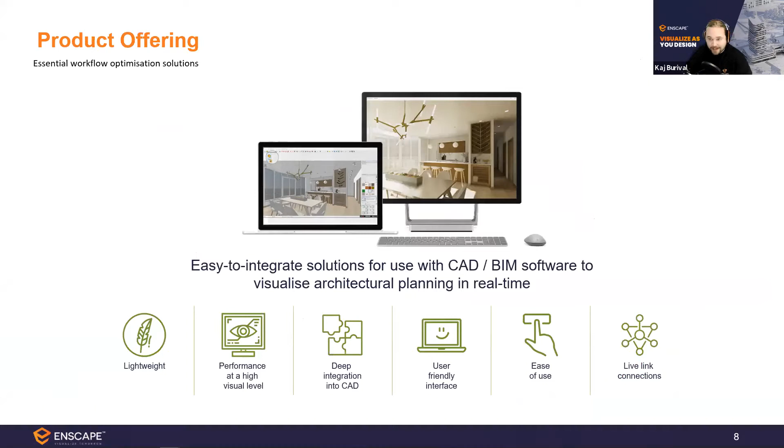Yeah, again, one of our main principles is to integrate directly with existing CAD, BIM, design software, that is Revit, ArchiCAD, SketchUp, Rhino, and Vectorworks at the moment. And this is really what puts one of the main benefits of Enscape into perspective.

With other visualization solutions, you will have a project that you're working on, a project that is stuffed with all manner of data, BIM information, fire safety and whatnot. And whenever you want to visualize it, you will have to take that model out of its course, out of the pipeline, and add some extra work, add materials, illuminate it properly, and of course also export renderings, whatever you may aim for, videos, images. And this alone is a huge time factor.

If anyone in the audience has visualized using a traditional visualization software before, you might have experienced that it can take literally hours to generate a single image on the computer, to render the image. And all of this is being solved by Enscape, because as you see at the bottom here, Enscape stays within your existing design. It accompanies your workflows.

We'll have a look at that in a second, but that means you see, of course, what you're changing. If you're changing a material in your design application, you will see that immediately in Enscape without having to deal with import, export issues and all of that. But that's just the start, because Enscape can also access your geolocation information in your design software. It can access your 3D views, your visibility settings, and in the case of Revit, for example, also things like design options, section boxes, and so on.

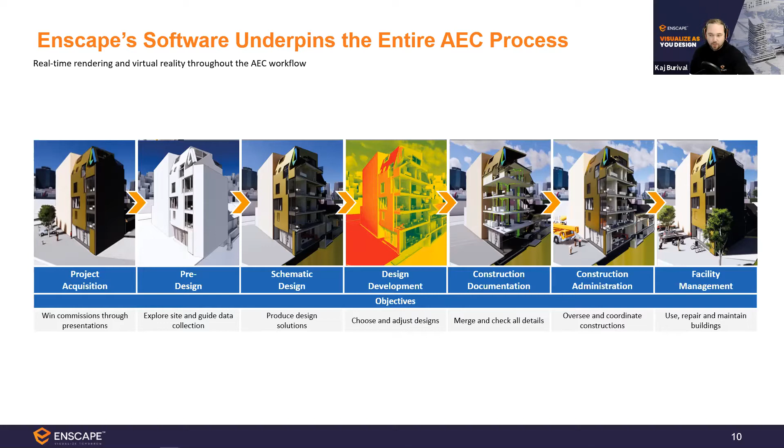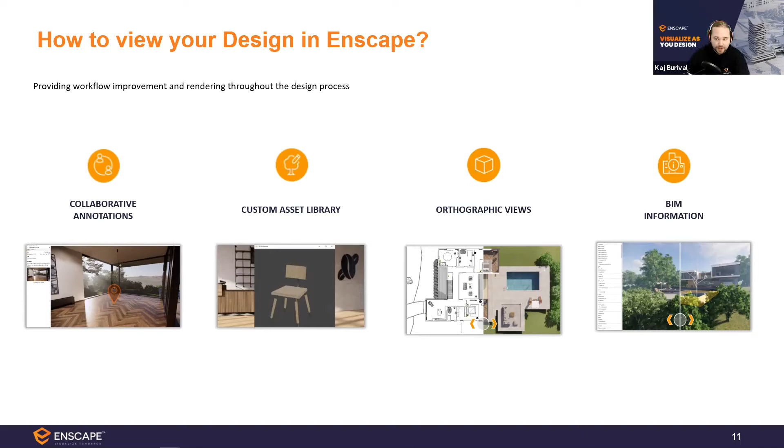We have BIM information loaded directly into Enscape, so you can use Enscape as a full stack, so to say, reviewing tool and get everything you need to know about your design immediately right from one source. This is also a couple of features that I'm going to show you live in just a second.

And you can even export standalone experiences from Enscape, meaning we can export one single file that your client or your supervisor, whoever, can open on their machine, and they can enable VR in that with just 1 click as well. And they don't even need an Enscape license for that. So you can generate entire experiences right out of your professional model with just 1, 2, 3 clicks.

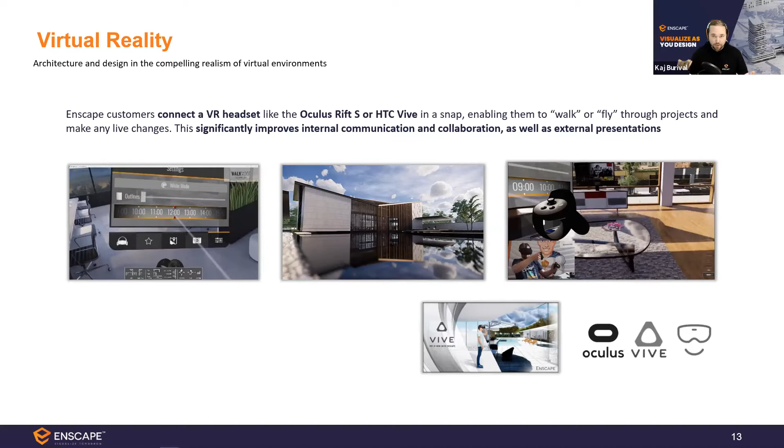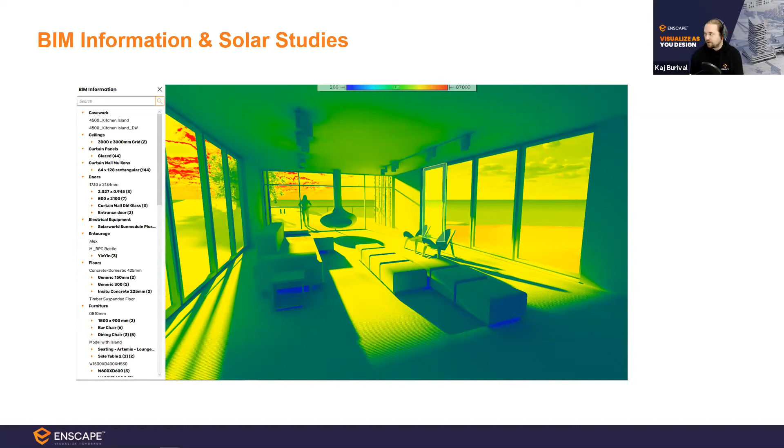So let's go to Revit. And I thought for this session, I would like to present on this basic sample project, which is being shipped with Revit, because I think it points out how Enscape can access any kind of model right away. You can put a lot of work into your visualization, polish everything and make it look just the way you want, but you don't have to. Enscape is really designed to be user-friendly.

So as opposed to a lot of other visualization softwares out there, you can really start with 1 click up here, open a window, and you have a great visualization right away. So visualization for everybody, that is what we are aiming for. Now, this is what Revit will look like after you have installed Enscape. You can download the installer as mentioned right away from our website and try it yourself. And this is what it will look like.

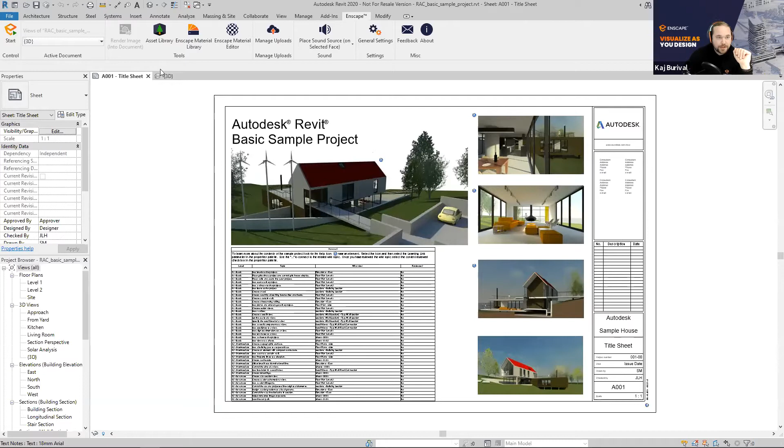Now we have a sample project provided by Revit, shipped with Revit. You can open this very sample project right away in your Revit instance. And we have Enscape set to default. So this is what Enscape looks like right out of the box once you've installed it. And I'm just going to click the start button up there.

You have noticed we have this additional toolbar in Revit, of course, that comes with the Enscape plugin. I'm going to go through the individual buttons and tell you what those mean. But this is the main effect I wanted to show you. Enscape will open in a separate window right away. It's a separate window, so it is probably more comfortable to work with it on two screens, so you can continue having Revit in full screen, but it works this way just as well.

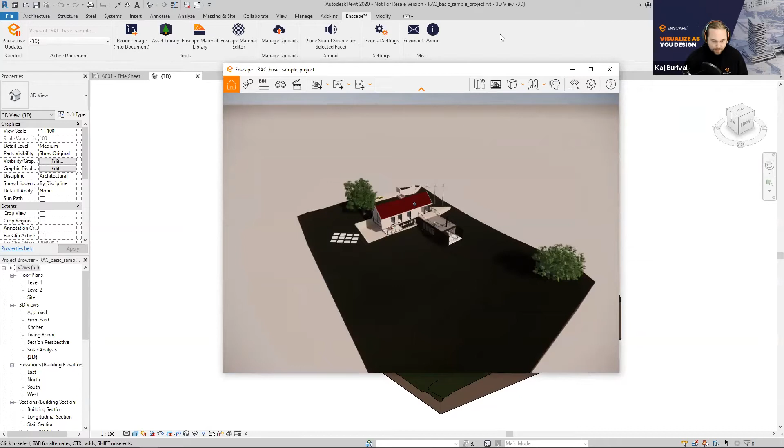And I'm going to use a little trick here. On Windows machines, you can press the Windows key and the right arrow key to dock one window to one half of the screen. And I'll keep Revit on the left half of the screen here.

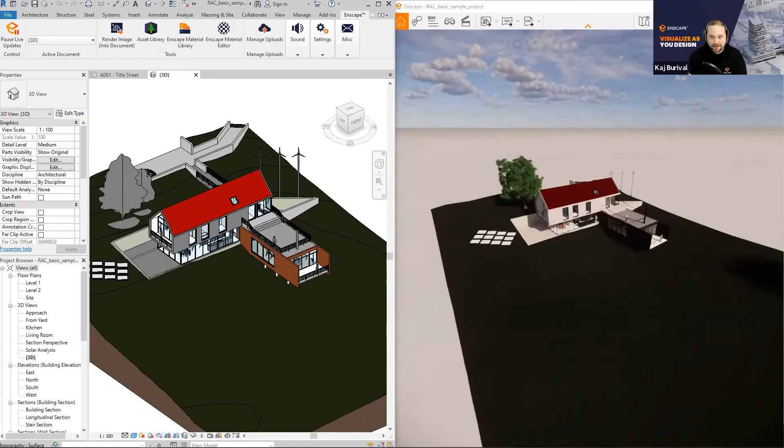Now, you might think the visualization we see on the right side is an image that has been generated in Enscape, but in that case, you're wrong, because this is actually interactive right away. So I can begin moving through the scene, exploring everything, have a look at the various perspectives, and if I want to, already start generating content.

If you are new to a 3D software like that, the navigation is kept really simple. You can always click this little question mark at the upper right corner, and it will show you how to navigate here. It is WASD: W to move forwards, S to move backwards, A and D to move left and right.

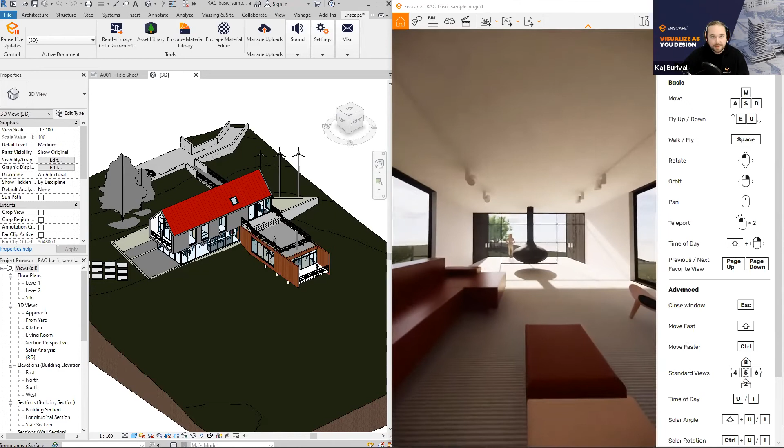This is a kind of navigation that is common to a lot of 3D games, so if you have any experience with that, you will feel at home right away. If not, I recommend to just hold the W key in the beginning and click the left mouse button and move the mouse to navigate and steer in which direction you want to go.

But that is just the beginning, of course. We can also hold the shift key and the right mouse button and move the mouse to change the daytime at any point of the day. And now you see a little clock in the lower right corner that tells us the daytime.

This is also not just any daytime or something. As I've mentioned before, we are taking all the data from Revit or from any other design application that we can get, which includes the sun settings here in Revit. So if I go to the sun settings, let's switch it to still and just cycle through a couple locations here in my default city list.

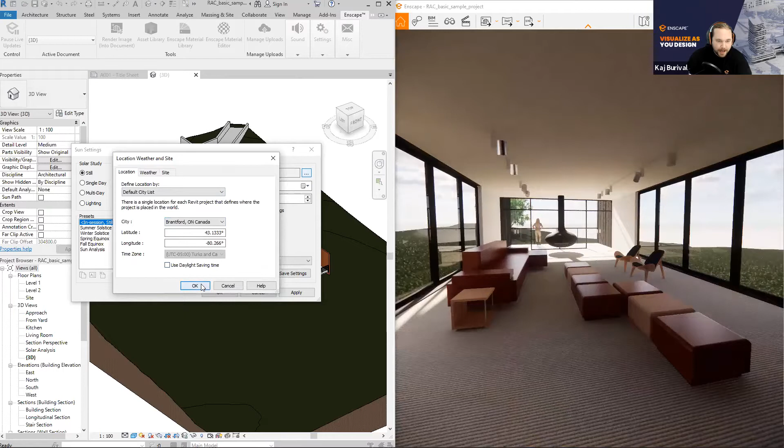You will see it will change the daytime right away, or the sun angle right away. And if I press OK, it will display the sun position, sun angle that is correct at that time of day, in that time of year, in that location.

So you can perform solar studies if you want to. You can really get a feeling for how the illumination will be in the building, in the project that you're working on once it's finished.

Now, at this point, I would like to do one thing. This might feel like a little bit of a skip ahead, but I would like to get rid of this white, perfect background we have there. So I'm going to open our visual settings in Enscape and pick one of the horizon backgrounds that we provide.

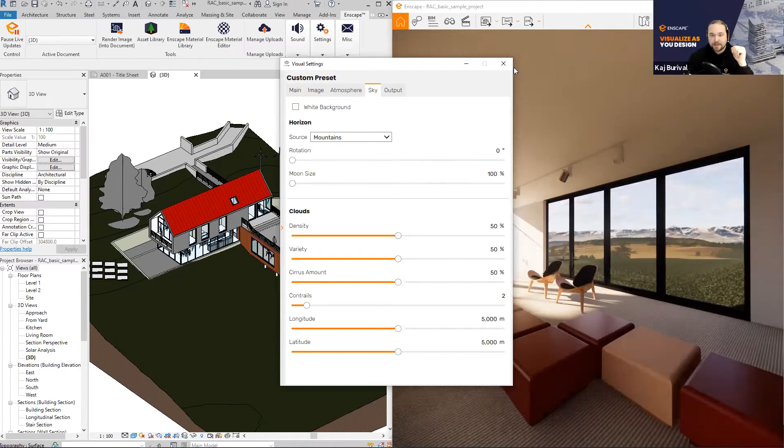I'm going with mountains because I like that one a lot. And once again, I want to highlight that this is the Revit basic sample project that we didn't change anything about, opened in Enscape with the default settings. I've just replaced the background.

And we see already that you can generate really convincing and emotional content in no time. One little tip from a visual artist: whenever you want to create beautiful, convincing, stunning visualizations, the key to that is detail, because it is easy to create something perfect and flawless on a computer, but the real world has flaws and has details and has a little bit of chaos everywhere.

So something like a horizon preset that I've just picked as an environment can go a long way in making your visualization believable and really make the viewer, the client, feel as if they are in that actual building. So yeah, this is what the sample model looks like by default.

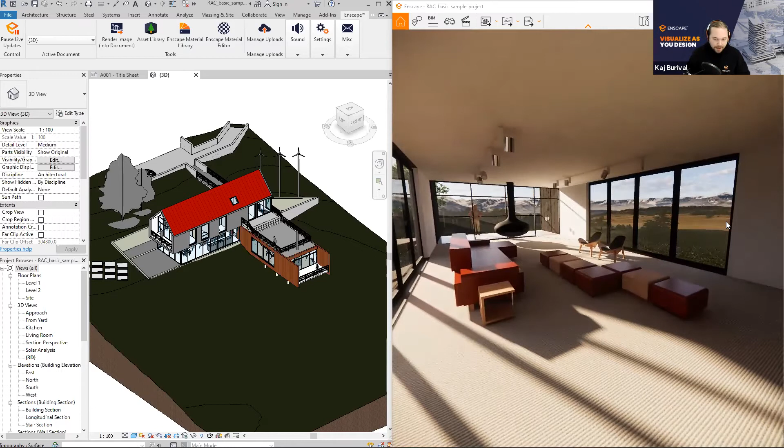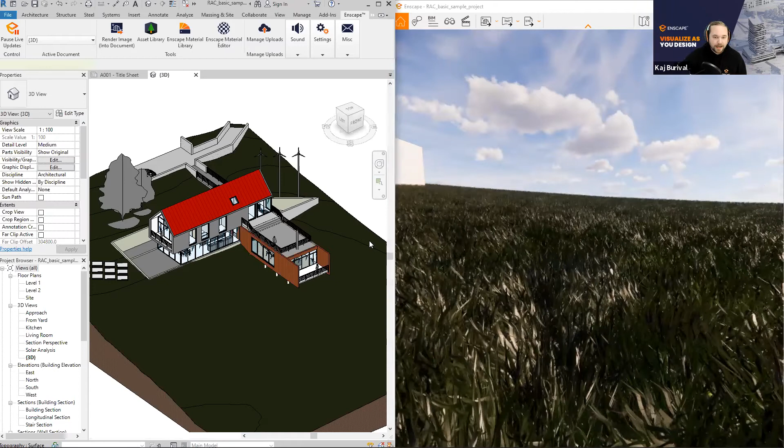A couple notes on that. You may, for example, realize that we have actual grass being displayed here. Now, I've told you that we did not change this model in any way. So how does Enscape know that this is supposed to be grass? Now, that is one of the many useful little additions that we've just added.

Once we've realized we have a great visualization platform here that people use to get familiar with their own designs, we've realized we have a huge power available to help them and elevate or simplify the processes even further with little tricks that just work for pretty much everyone.

So in this case, we just told Enscape to look for the material name. We have our own material editor, and we will have a look at that later on, so you can really get into detail creating materials and all of that. But in this case, Enscape is just looking for the material name, and if it contains the word grass, we assume that you want this to be displayed as actual grass blades that also move in the wind like this. So once again, you don't have to put in any effort here.

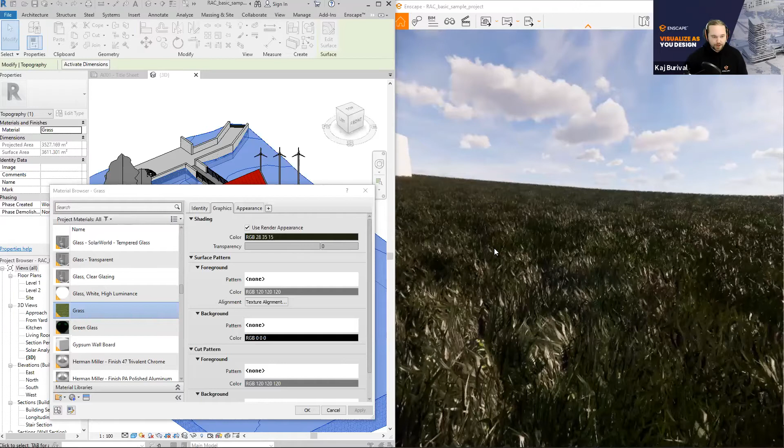If you have a material that is called grass, it will work right away. And as mentioned before, of course, it is taking the rest of the material information directly from Revit. So if we wanted to go with a more light or brighter kind of grass, for example, this default grass in the sample project is always really, really dark.

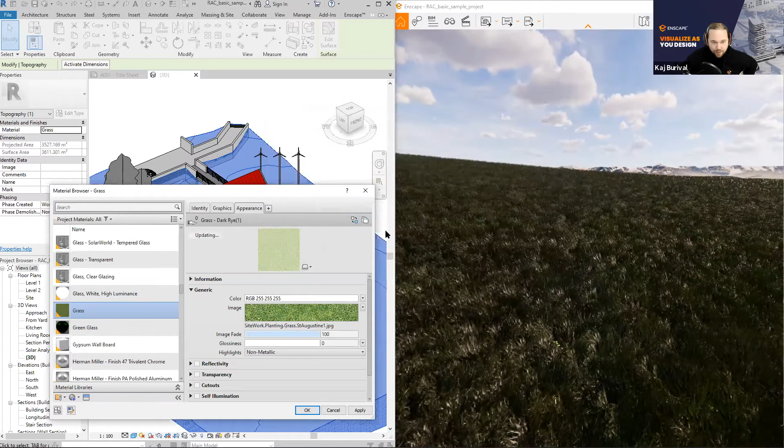Let's have a look at what this texture looks like and press apply, and you will see those changes in Enscape immediately. It looks way better, in my opinion, right away. I've mentioned that before, but to really drive this point home...

Enscape is connected to Revit the entire time. So if we move something here, for example, we will see the change applied in Enscape right away. If I delete something, the same thing will happen - it will vanish from my Enscape visualization. And if I press Control Z in Revit to undo what I've just done, it will do the same in Enscape. This might feel like a bit of a skip ahead, but everything is so closely connected in Enscape, and it's so easy to combine all the different aspects, that I can just show you that quickly here.

I have this VR headset, an Oculus Rift S in my case, that I've shown you before, and I just need to click this button up here, VR headset. Once again, we have just opened any Revit model here, and we can get it into a VR experience with just 2 clicks, starting Enscape and enabling VR.

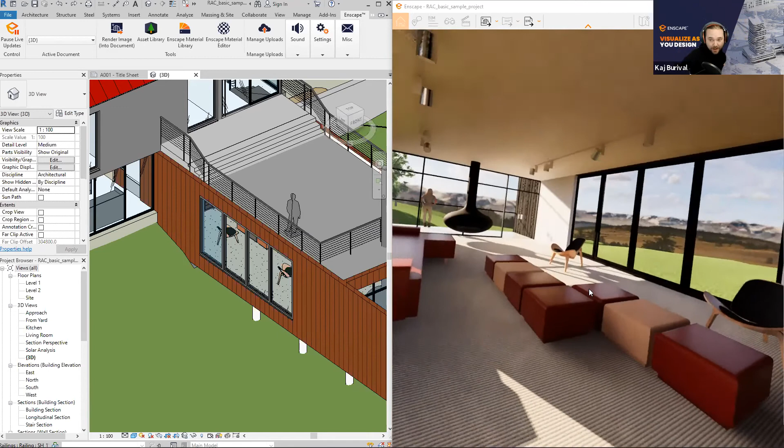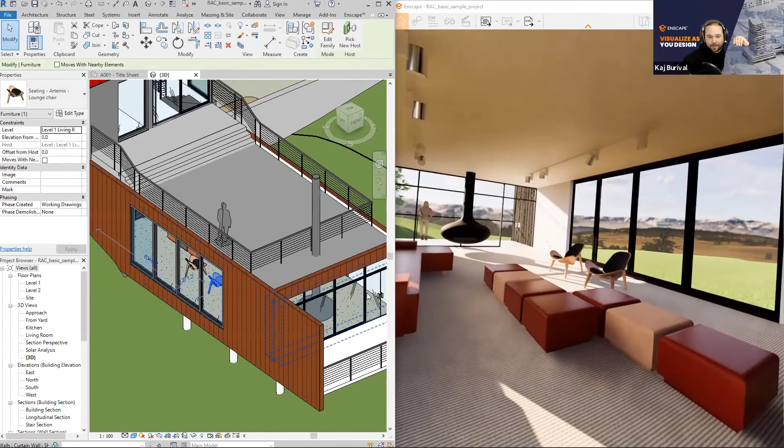Now guess what? If I wanted to edit the model while I might have, for example, a team member or a client of mine in the VR experience - imagine they are seeing their future home here, and they might say, I like this, but I would like to see what the floor would look like with wood on it, for example.

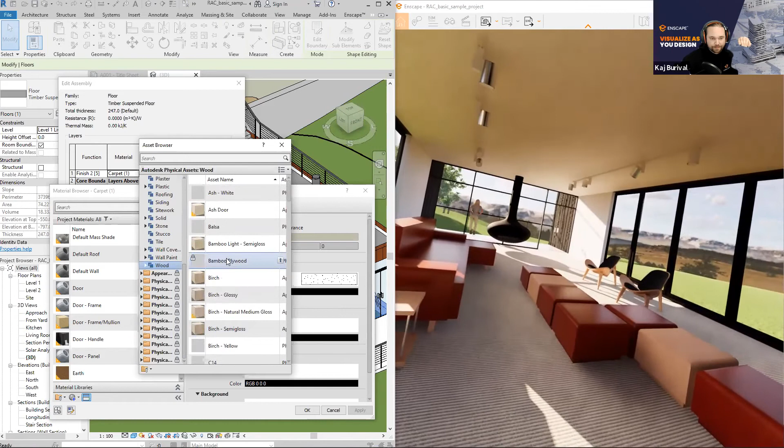So we can just go in here. Let me just grab any kind of wood material right from the Revit default material library. This one looks nice, let's go with cherry. Click apply, and even though we are in a virtual reality experience, you see all of those changes applied right away as a viewer.

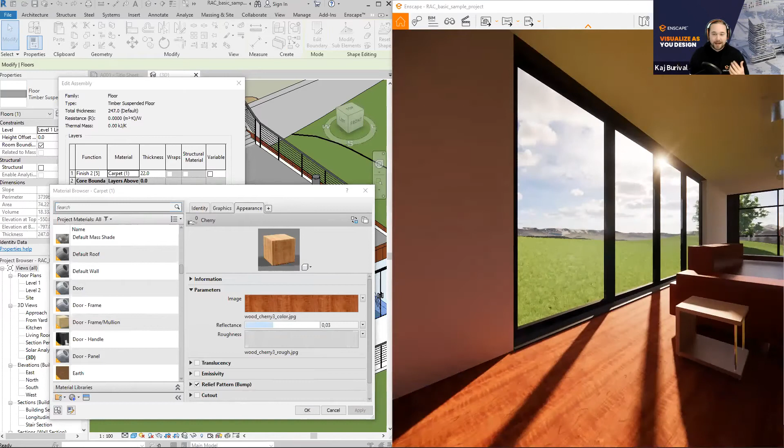So once again, there is plenty for me to show you along the way there, but that's supposed to just show you how well Enscape integrates into your existing workflows and how you can just continue working like you used to, and Enscape just follows along. I've just canceled the material switch here, so we are back to our initial material.

All right, now we could continue with the buttons, explaining what Enscape does and how it does that. But I want to show you one more treat before we get there, because I've mentioned the speed of rendering and the speed of how you can generate marketing content.

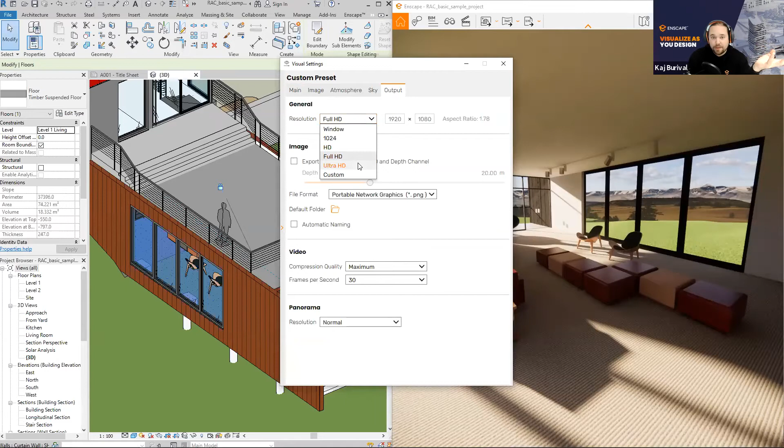This used to be a very, very time-consuming task. For example, for an ultra HD rendering in 4K with traditional software - and I've been there as a 3D artist - it's easy to wait 2 hours for that or longer, depending on the perspective. And as professional artists, once that image is finished is usually when you notice, oh, I still wanted to change that material, or something isn't right there, and you have to redo it again. With Enscape, we are changing the order of those things.

So you see your result before you generate it. You always see what your actual export, your actual visualization, will look like. And once you get to exporting it, to actually creating a file out of it, it's also incredibly fast. I've set up a 4K resolution for my rendering, and I just have to click that button up there to generate a rendering. This 4K rendering is actually finished faster than I can finish this sentence.

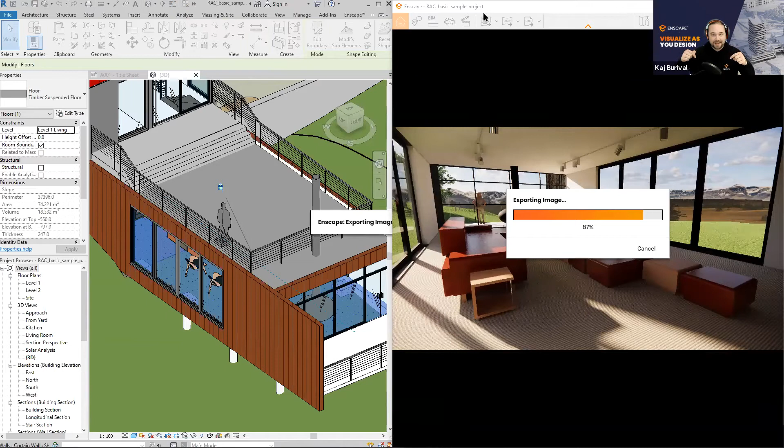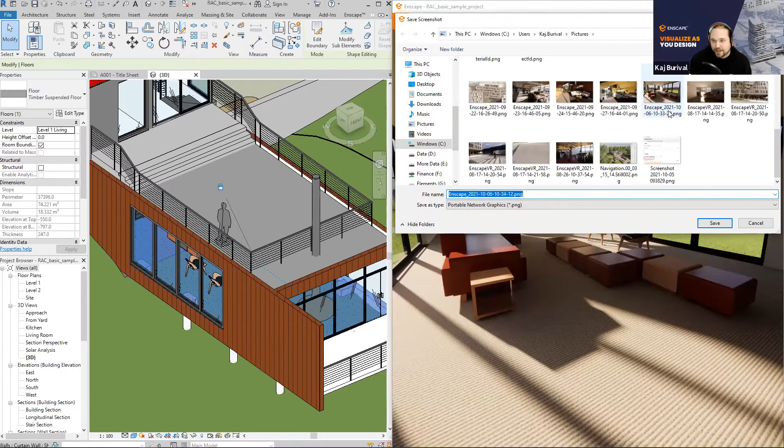Let's have a look at the results. Let me just open my pictures folder here. There we go - and where is my image? There it is. This is the... oh no, sorry, that's the wrong result, that's from another presentation. Let me see, did I save it in the right place? It's so quick, you could probably just do it again anyway. Oh, this is the one. So there's something wrong with my order here, but just a second - there we are. So this is the 4K rendering that I've just created.

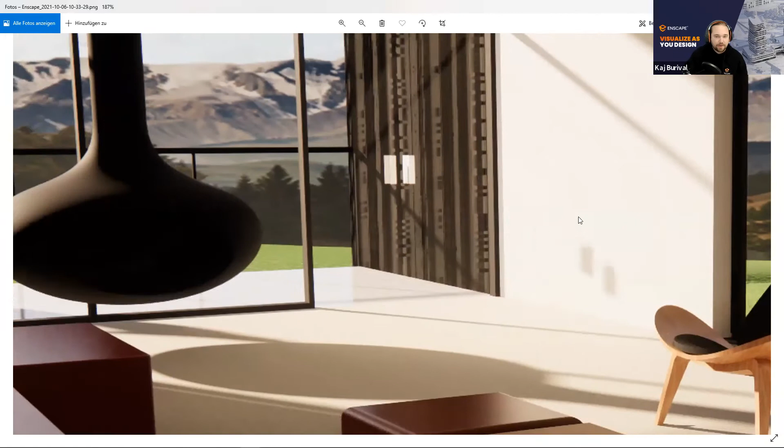And as you see, you can zoom in and you have all the detail that you could expect, even with those little details that you have on the Revit materials already. But we'll dive deeper into the material content soon enough.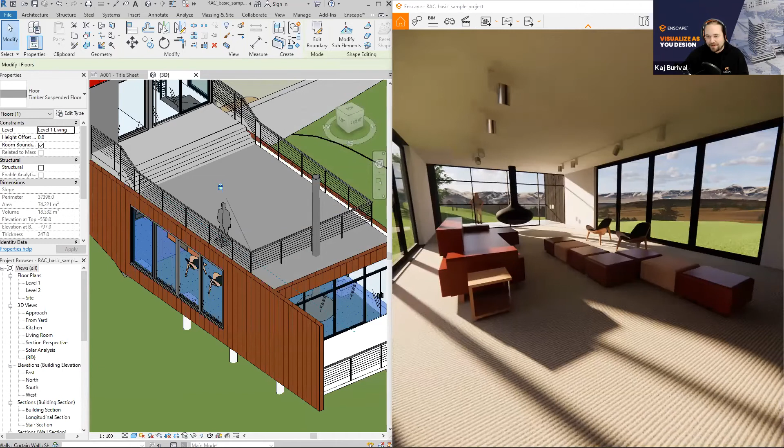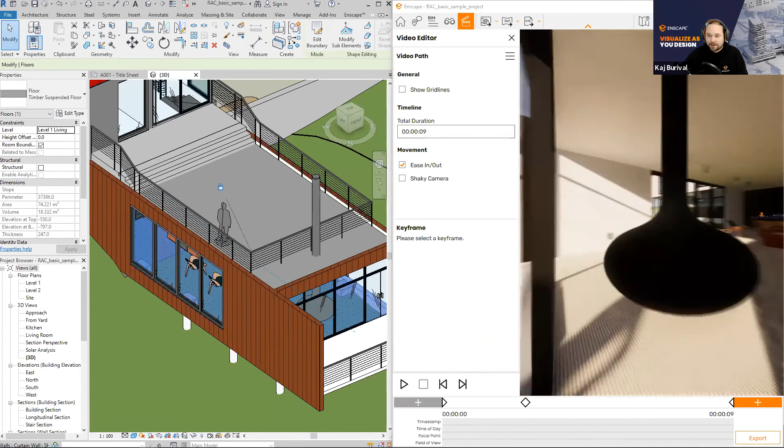Maybe to show off the speed of Enscape even more, let me quickly generate a video. If any one of you has ever tried to render a video, be that with Revit's onboard video creation or any external software, you know that it is its own task to set up. I'll go into detail on this later, but it takes time to set up and even longer to generate the actual video file. Enscape is meant to be really easy to use, so I can generate this 23-second video in a couple of seconds.

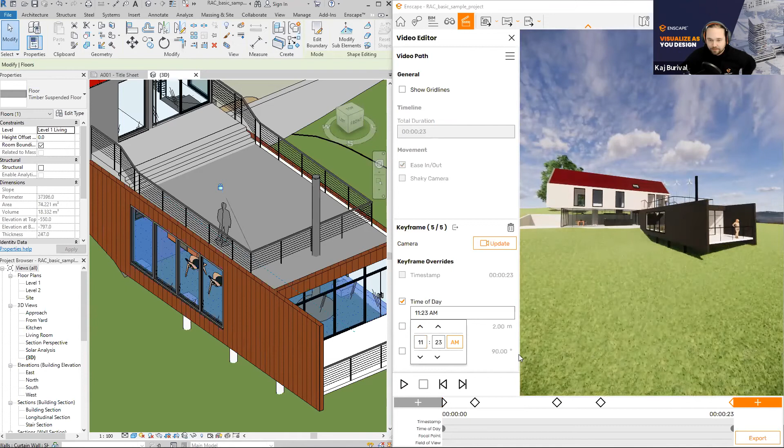If I'm satisfied with it, let me actually dial in some time lapse as well. I'll set a time of day for my first keyframe, and switch to a different time of day towards the end. Let's update, press P to preview what our video looks like. Now we have a moving sun, and clouds that move across the sky.

Just to show you how quick you can generate results, let me export this. We have 23 seconds, full HD, 30 frames per second. Let me export that, and during this, I like to tell the story back in my day, in 2014 or whatever, when I was working with Maya as my 3D software.

Now with Enscape, you can plan a video like this really quickly, grab a coffee, come back, and the video is finished. You can send it to your client, get feedback on what you've designed, and get going much faster.

Since the beginning, when we've spoken to large architecture firms, they've told us about their workflows. They would meet up with the client, the client would maybe not have been satisfied with the look of their designs, and then they had to set up a new appointment 6 weeks later to generate new content and present it again.

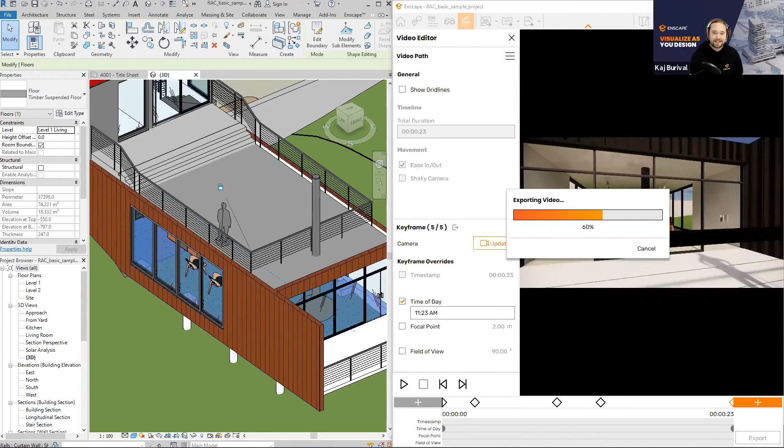With Enscape, you can do multiple iterations during one single meeting with the client, and even in virtual reality. So I think you can imagine how useful and how much of a speed factor Enscape is for architects, creatives, all around the world.

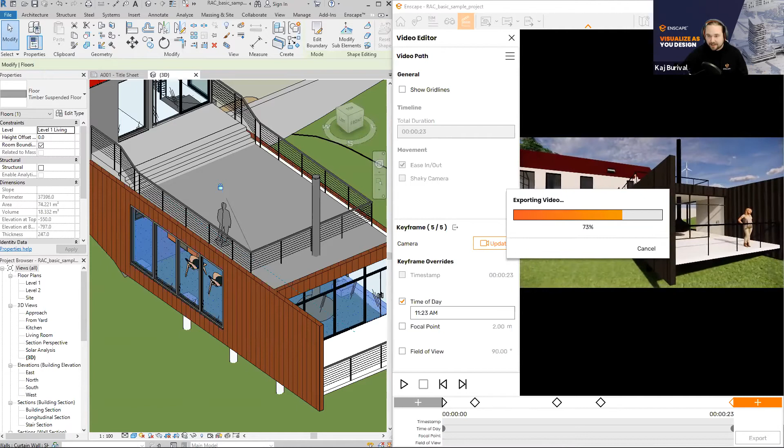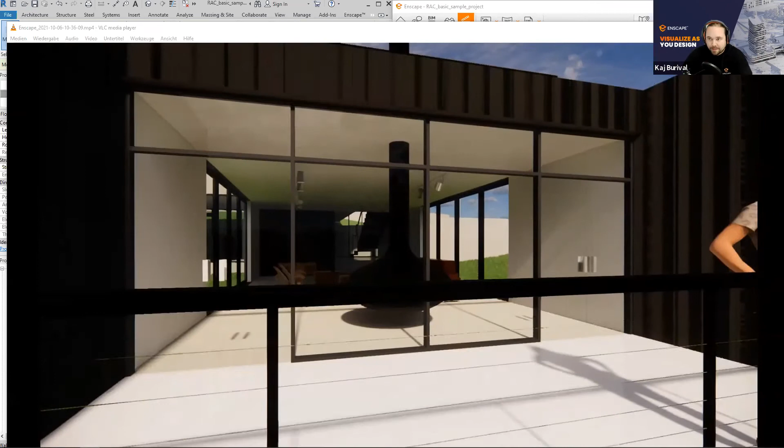So let's see, you know what, I can actually cancel this video here because I want to show you a couple more things. Enscape will still generate the video up to that point, so this is what that looks like. We have an MP4 file that we can put on YouTube, put onto our website, or directly share with the client immediately, and the file is 56 megabytes actually. So it's really simple, non-problematic, and you can just generate content.

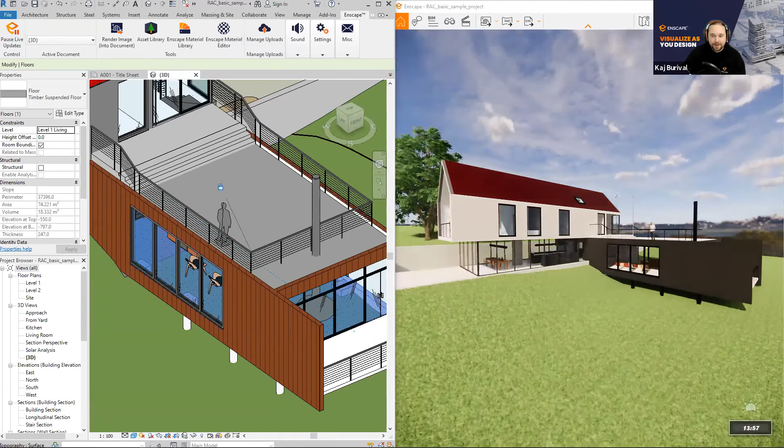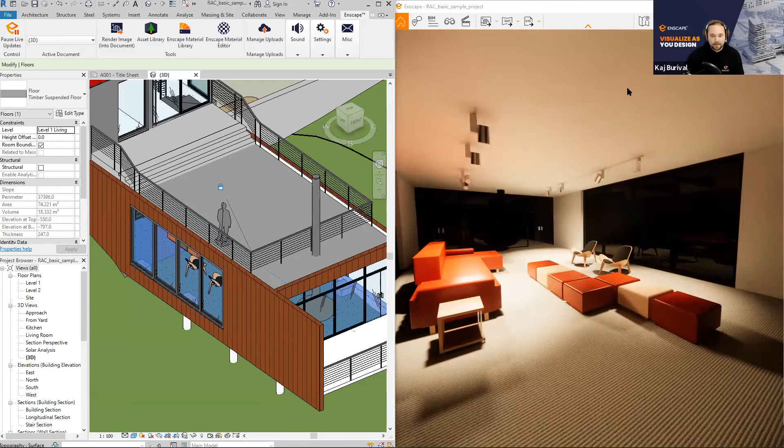But let's go into a little more detail here. Before I explain the buttons up here, one last thing - I've missed out on lighting so far, but you might have guessed that by now. Enscape is just taking the correct lighting from your Revit project just as well. There are no specific light sources for Enscape other than SketchUp - that's one exception because it doesn't have its own lighting system. But in case of Revit, it will take your light shape, your light distribution type. If you're using an IES light, which improves the visual quality of the light, all of that is regarded and read by Enscape and displayed correctly. So I wanted to highlight that as well.

Right, let me see, there's already one question I can answer right away. Which GPU are you using? It seems the video export time is quite fast. In my case, I'm using an NVIDIA RTX 2080 on my machine here. It's a good graphics card, but by far not the most recent or most powerful one. As I've mentioned before, Enscape being all about simplicity and ease of access, that's also true for hardware - we really try to work on as many machines as possible, including as old machines as possible.

And except for VR, which always requires a powerful machine, Enscape is incredibly forgiving and non-demanding in terms of hardware. So you can have a look at our system requirements. I can share the link with you, of course, but you don't even have to have a powerful machine like mine. Videos will render fast in any case.

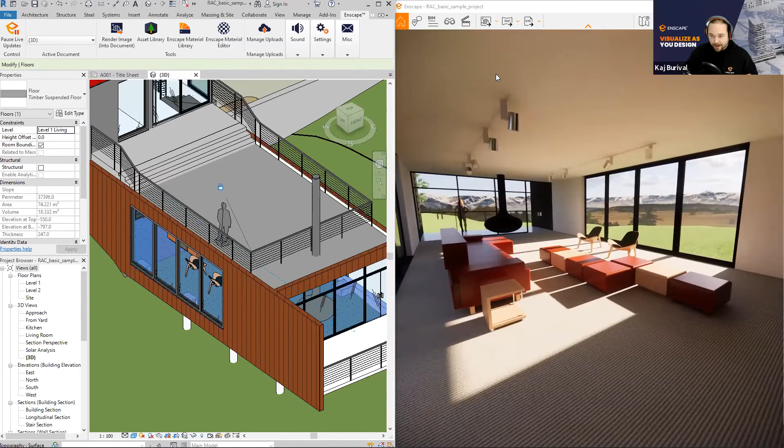All right, let me show you a little bit of the interface and go into a little more detail. Now we have this button that I've pressed initially to start Enscape. Once Enscape is started, it will turn into the pause live updates button. This will just pause the updates from whatever you're doing in Revit, because sometimes you don't want to have Enscape update all the time. And as soon as you click resume, it will then update those changes.

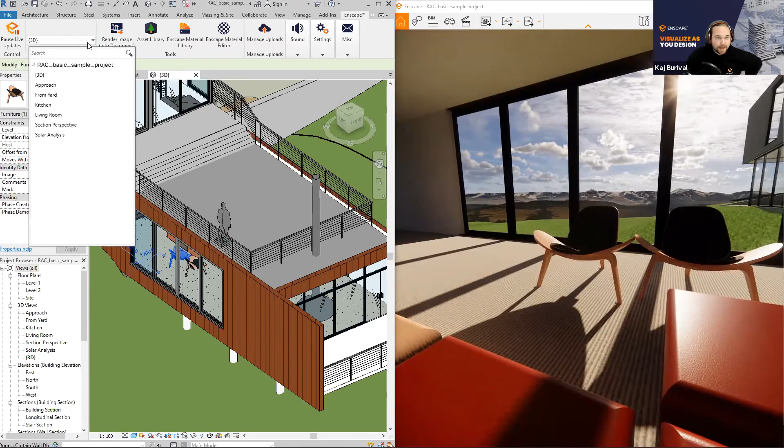Really simple. Next one is the 3D view selector that you can access. This, as you see, only accesses your 3D views in Revit. So we have the same 3D views down here as we have them in Enscape. Once again, Enscape is trying not to generate its own data. It is trying to take your data and work reasonably with it.

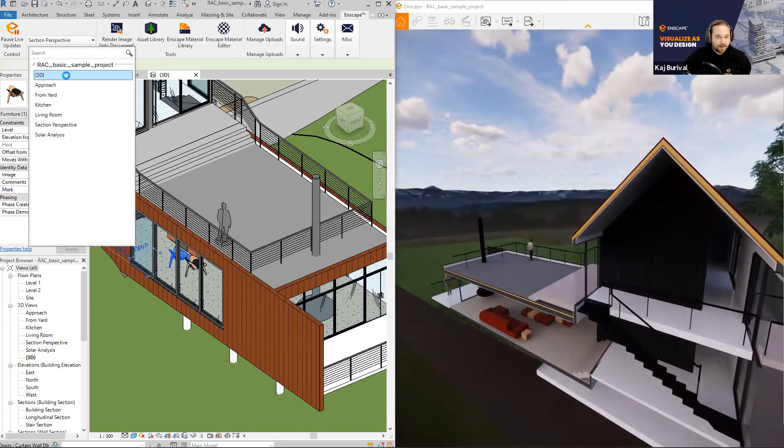This is also really, really useful because, as I've mentioned initially, if you have some settings set up for any of your 3D views, like visibility, maybe you have hidden the walls in one view, or you have a section perspective applied, well, Enscape reads that from that view just as well and displays it correctly, down to even the structural materials, as you see here. So really all the data that we can get and use for your benefit, we do that. And yeah, everyone's happy, period.

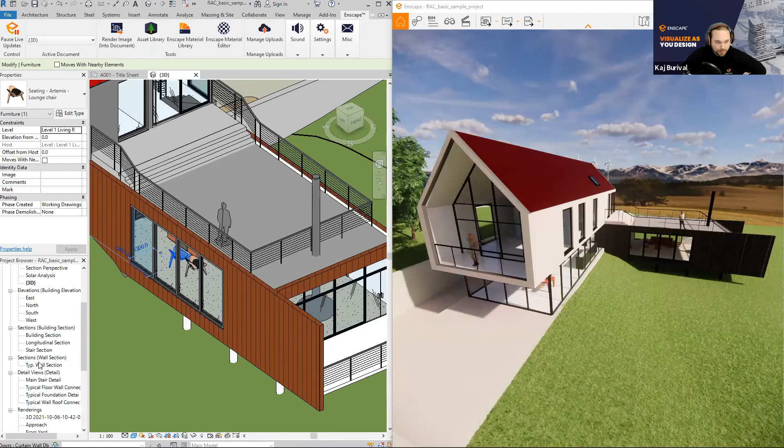So next button here on the Revit side is render image into document. This is a Revit-only setting, which means if you want to use a rendering inside of Revit, you don't have to export it as an image file and re-import it. You can also save it directly in your renderings folder here in Revit.

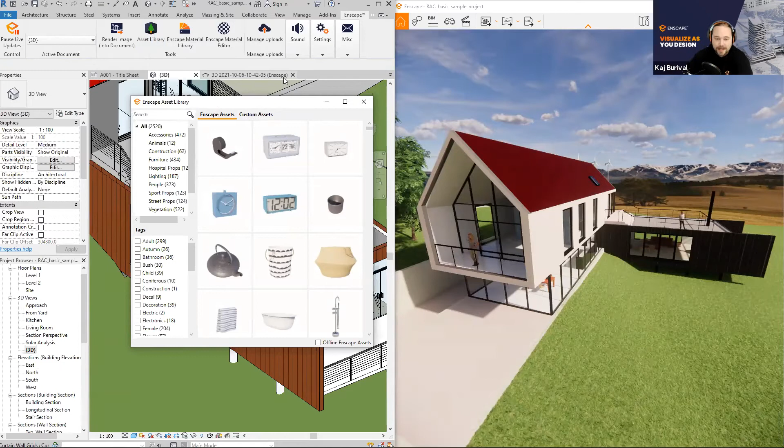Next, we have the asset library. Now, this is a huge one. I've mentioned that in the beginning. We have a library of more than 2,500 assets, and it's always growing with every Enscape release. By the way, everything I'm mentioning here is available with every single Enscape subscription. There are no differences in packages or anything. We just give you everything you need with every single license, and it's up to you to make great work or great art out of it.

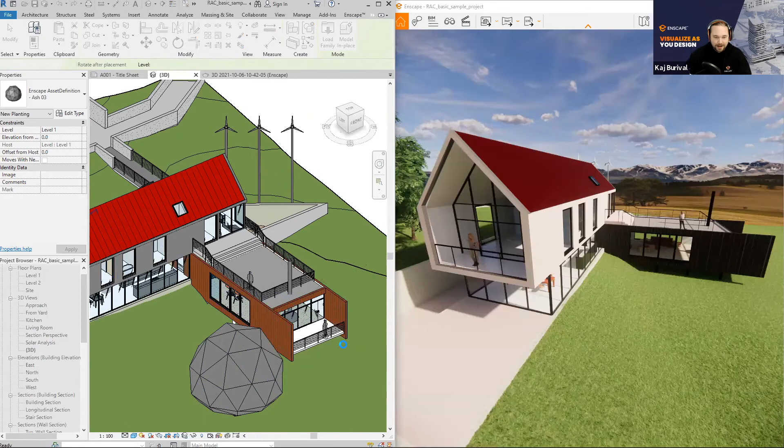Now, these 3D assets that we provide are really, once again, taking the best of both worlds, so to say, because you might know Revit is not ideal to work with external models. So on the Revit side, we can have a placeholder to keep the performance well in Revit, but in Enscape, we have this high detail animated model that you can set dress your scene with, and Enscape is really made for beautiful, complex graphics and to still perform well. So that is really useful.

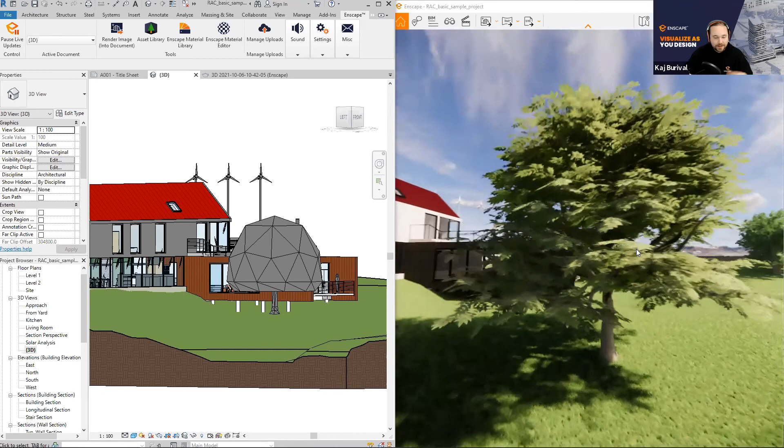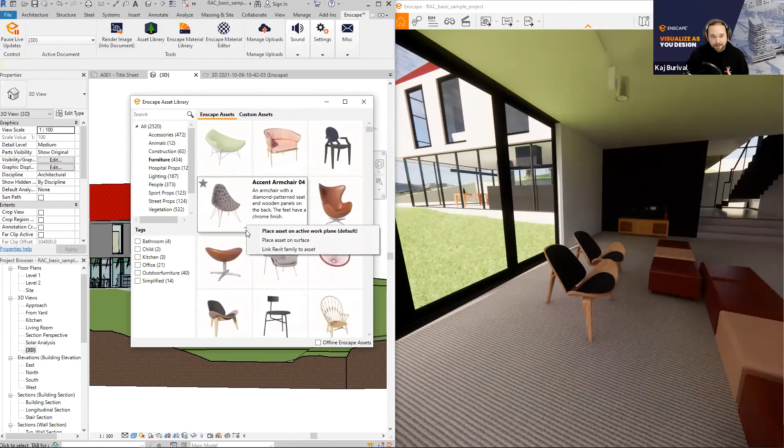If you want to drive this a little further, you can even connect any of our assets, or, as I mentioned initially, you can create your own custom assets. You can connect any of these to existing Revit families. So you can control exactly what something is supposed to look like in Revit and in Enscape. So I can just click these three dots here, link Revit family to assets. And I know these chairs are called Artemis. So I'm just going to connect those, and you'll see nothing changes in Revit.

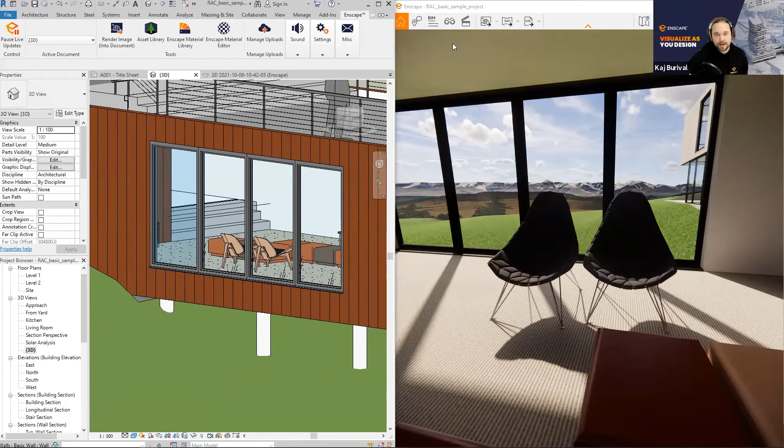We still have our family there with all the information connected, but Enscape just knows to replace that family with that high quality model. You might want to keep it that way because, of course, Revit can hold a lot of valuable information. And as mentioned before, you can review that right in Enscape as well by either pressing this button up here, the BIM mode, or just press B.

This lets you select an object in Enscape, and it will access the data from Revit. So in this case, you see we now have our Artemis lounge chair data here, including things like manufacturer data, pricing, whatever details you are saving in the building information modeling, in the BIM information in Revit.

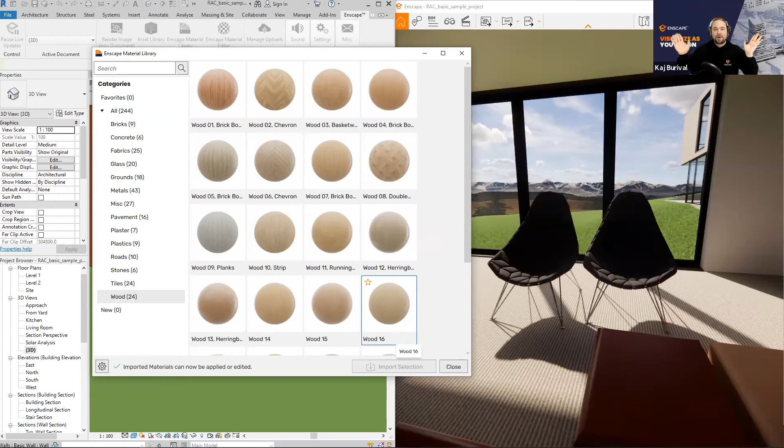Then, with the latest update, we've also introduced our own Enscape material library, which provides a series of predefined materials that you can use and that are just preset to look stunning right away. And the way you handle these is you just click on one and import it. And once again, we are not trying to split up your workflows in any way. This will just import this material into your existing Revit material library. So let's see.

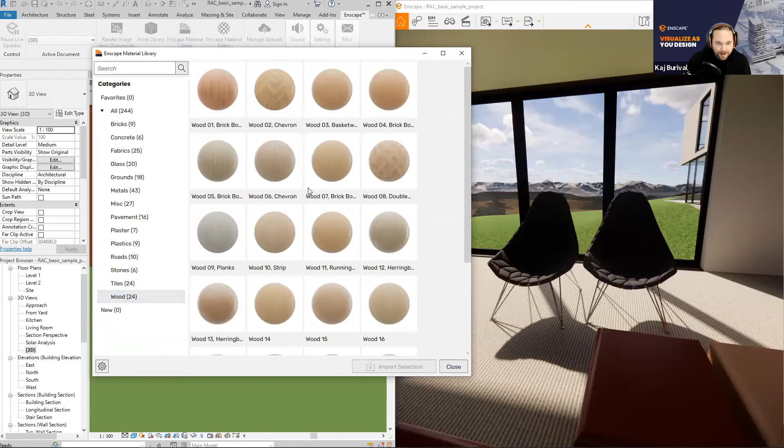I might have forgotten what the name of the material was already. Let's see if I can find it, or I'm just going to have to open the material library again. Oh no, let me just open it again. Oh, that's the wrong one. To see which one I've just downloaded. And that was Wood 06, I think. So let's get back to our Revit material library. Go to W, and there it is, Wood 06 Chevron.

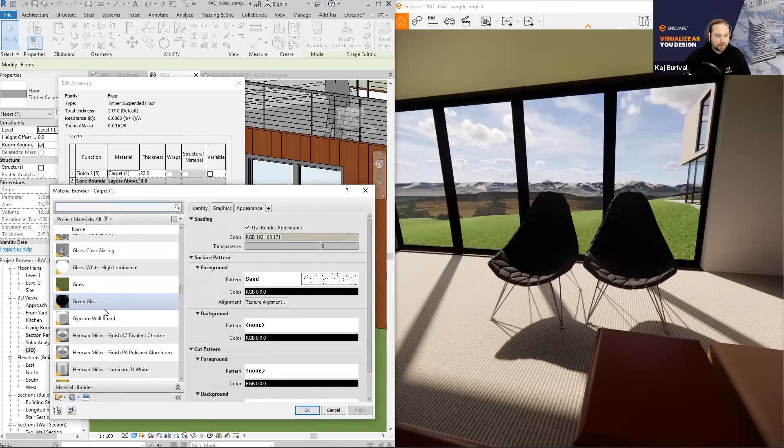So actually, I might already want to apply this to my floor here. And as you see, I'm doing all the changes to the model always in Revit. Enscape is really not meant to change anything about your model. It is meant to visualize it and help you understand it in the best possible way. So this is the material that we've downloaded.

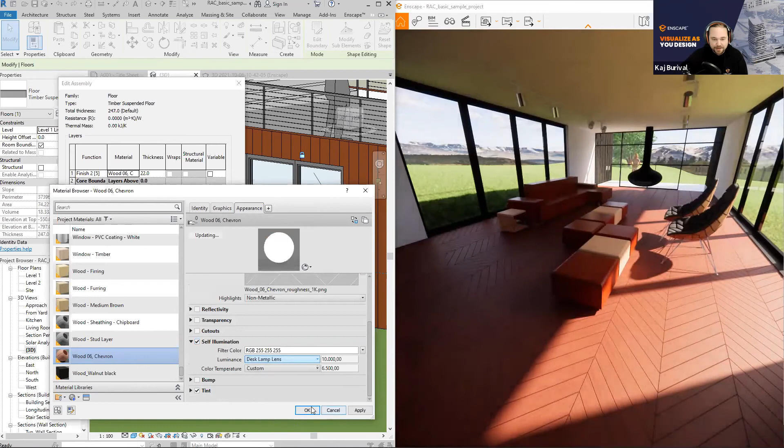However, it is now a default material in your Revit sphere. So if we want to change anything about it, for example, maybe the client wants to see a more reddish wood. Let's change it here in Revit, and you see the changes update in Enscape right away. And that is true for all of these things. So if we wanted to add some self-illumination to the mix, if we have like a monitor or something that is supposed to glow, all of these features are being supported by Enscape.

Let's switch back to daytime. Let's switch back to our Enscape toolbar and let me have a look at the time. I'm so much rambling and I have so much fun talking about Enscape. The time flies as always.

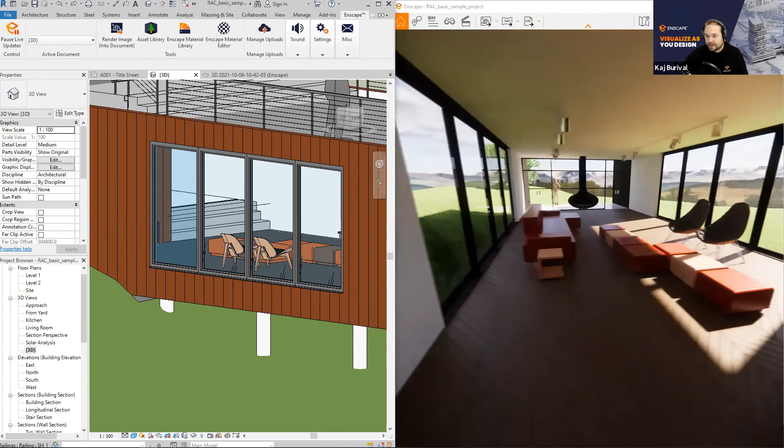There's another question. Will ray traced sun shadows work in the native plugin in the future? We have actually ray traced sun shadows, we always had a sort of ray tracing or path tracing with our shadows. So they work right away. I'm not sure if I understood the question right. Of course, if there was a misunderstanding, please feel free to clarify.

Then we also have our own Enscape material editor for Revit. We have very comparable settings to the Revit material editor, so you will feel at home right away. But we also have different material types. For example, the grass that I've shown you before, we can make our floor look like water and so on. And once again, you see this beauty of having direct feedback and directly seeing what you're changing here. And that is really, really useful. There we go. I like this floor most.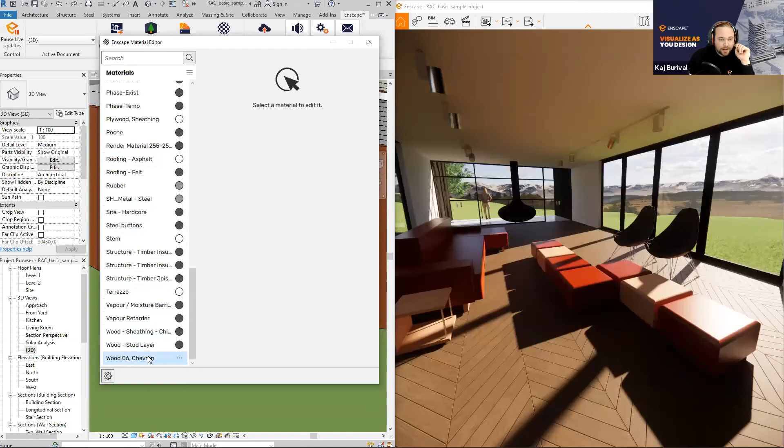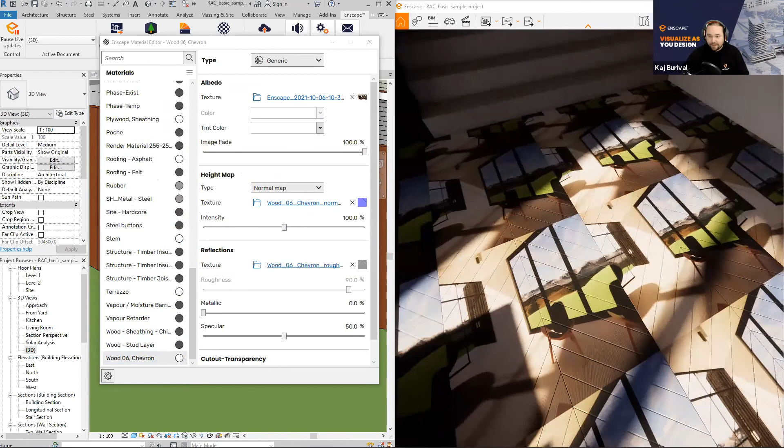Also, one little tip that we have added with one of our recent updates, you can even load in video files as image files. So if you have something like a video, like maybe the video that we've done earlier, you can load them in instead of image textures and use them the same way. So if you want to visualize a monitor, fire, anything that moves pretty much, you can go that way just as well. And once again, we can combine the best of both worlds because Revit does not provide this feature natively, but we thought it would be really useful for our users.

Next, here is the Manage Uploads button. I'll treat this just briefly. Here you can access panoramas that you have created. Panoramas, 360-degree images, or web standalones. So I've mentioned before that you can export your entire Enscape experience into one single file. Well, you can also upload it to the cloud and let it be reviewed in a browser. So you can put a link on your website and people can review your designs right away in their web browser. Or you can share a panorama like this.

Let me actually take this one and let me remove it from the cloud so it looks like I've just generated the panorama. By the way, to generate that panorama, you click the button up here. You have two types of panoramas. One of them is meant for Google Cardboard, so a mobile phone-based VR experience. And let me just upload this to the cloud.

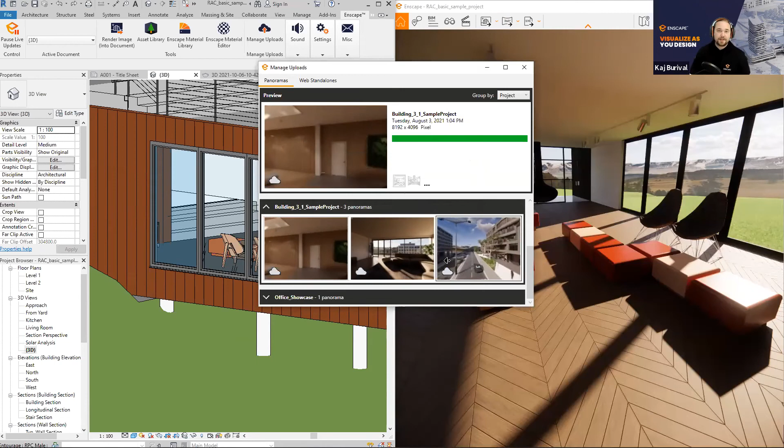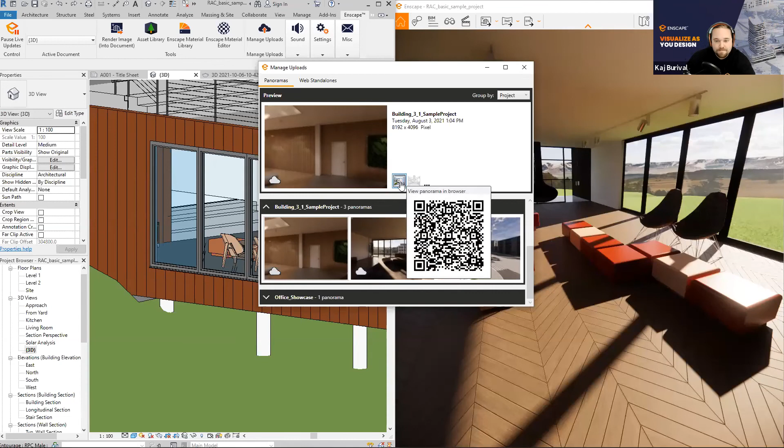And this lets you share this panorama in no time as well, because you can, for example, share a QR code. If someone in the audience is quick, you can scan this QR code with your mobile phone and you will see the panorama on your phone right away with the movement tracking and everything. So you can, for example, print these as stickers and put them onto the construction site for people to watch the full experience. Or you can, of course, also just access it in the browser, share the link.

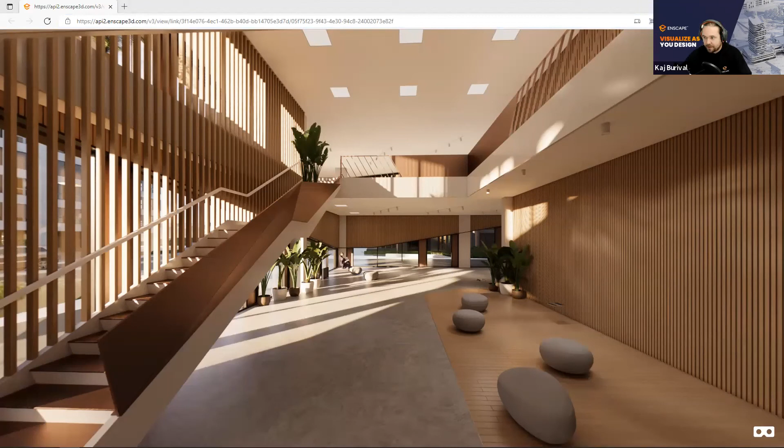Let me actually share this with all of you in the chat if you want to review it in the browser, but don't do so yet because we only have 10 minutes left as far as I see it. And I have still so much to show you that is really, really nice and useful.

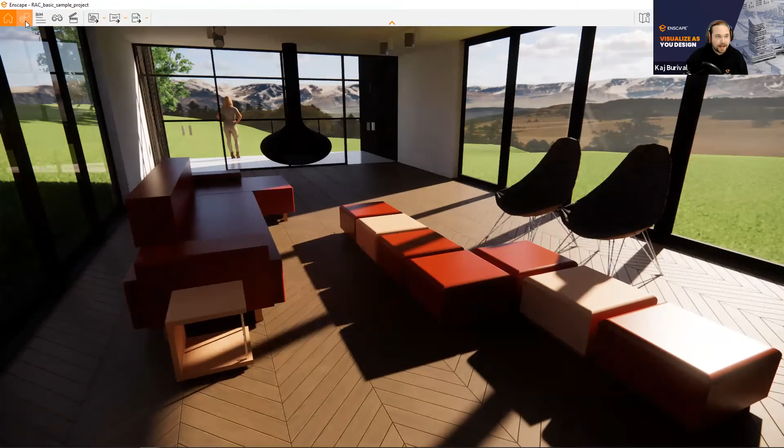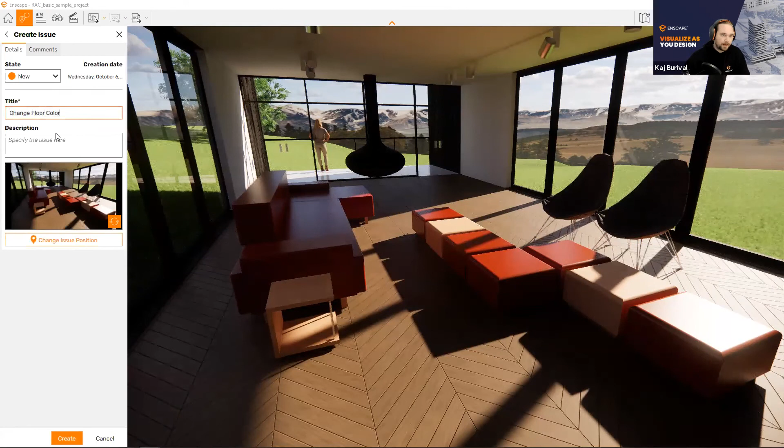So we can simulate sound in Enscape, but let me actually put Enscape into full screen here. And let's have a closer look at the exports and the ways of interacting with your project. I've shown you the BIM, building information data before. I also want to show you our collaborative annotations, which means you can create an issue down here, add a title, and save that as an issue here in my project.

And now there are multiple ways of sharing these issues. You can, for example, export them as BCF, BIM Collaboration Format, that is the industry standard. You can share these issues using BIM Track, which is also a very commonly used software. Or you can just share your Revit project, because Enscape will save any of these issues that you have here, and of course all the comments that you can leave to it and so on, right in the Revit file. So if you're working on a shared model file, or if you're giving your work to a contractor or something like that, they can review these issues right in Enscape directly from the Revit model just as well.

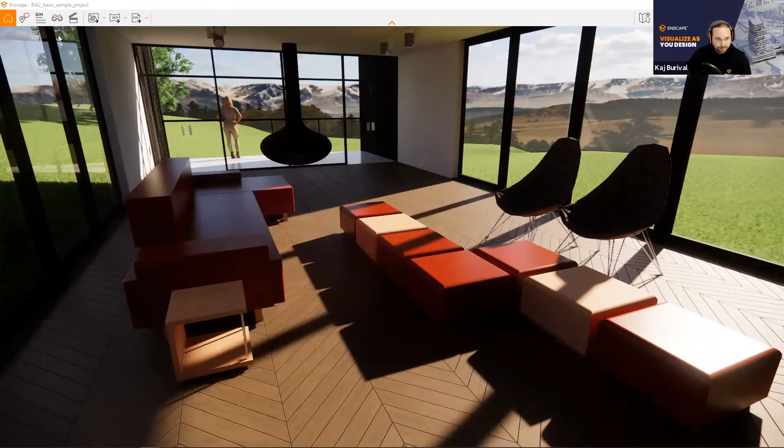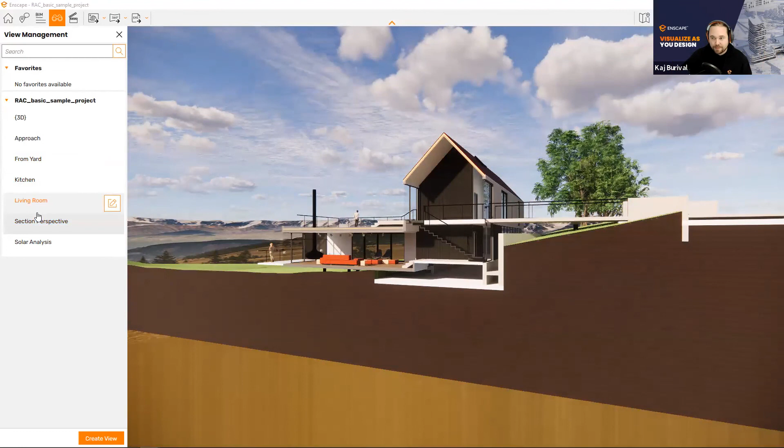Next, I want to show you the view management, which you can also open by pressing the F key. And this will let you access the same views directly from Revit that we have seen earlier. And once again, if we switch to a view with a section perspective, it will apply that section perspective. If we switch to a view with a design option applied or view settings, it will read all of that, the datetime, and that way you can prepare a full-fledged presentation up front just using your 3D views.

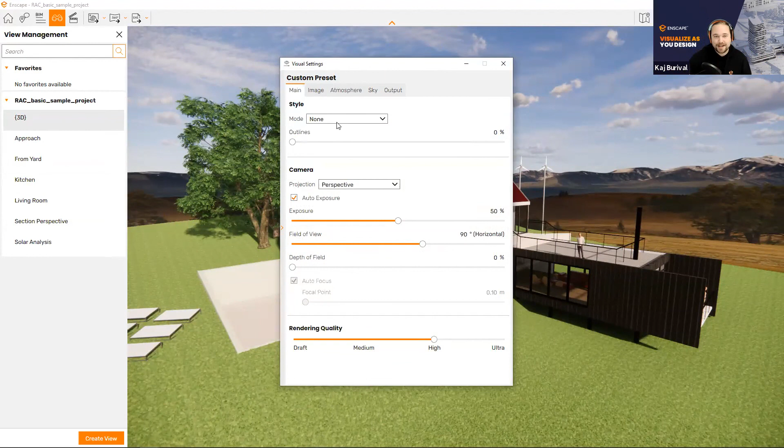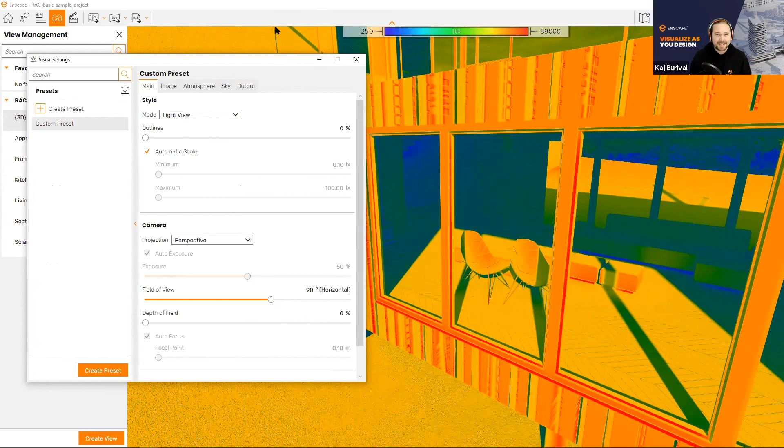You can even drive this further than that by going to the visual settings. The visual settings are a pot of gold that we didn't get to discuss yet, but you can switch to light view in here, for example, to get an analysis of how much lux is falling onto each surface. And you can connect these settings via presets to your 3D views just as well. So you can really control a full presentation and prepare it upfront. I call it the Enscape PowerPoint presentation, so to say, and really have full control over everything that you want to show.

So yeah, I see that the time flew once again. I didn't really get into the details of how to generate these exports. There are plenty of things to show, but we have a couple of really great tutorials on our website that will help anybody to get started with Enscape. And honestly, since it's just honoring your existing workflows, you can get really creative with all of this, but there is no requirement for it. You can just open the window, navigate a bit, and do the rest in Revit, and Enscape will just follow.

So I'm being asked, do you want to allow some minutes for Q&A audio? I think I want to do that. There was one question before that.

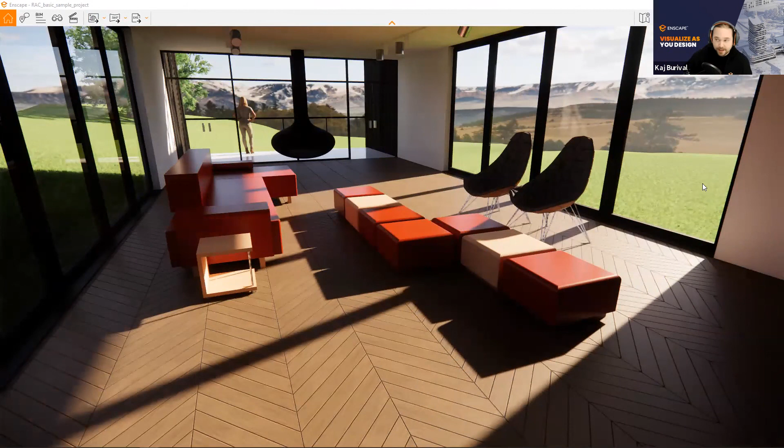Does video texture support AVI and MOV format? Yes, it does. Let me actually show you what formats are being supported here. Let me open the material editor, go into any one here, and all supported files. We can go with video texture files. We have MP4, MPEG, M2V, 3GP, AVI, MOV, and MKV, which we support as video textures. So I hope that answers that question.